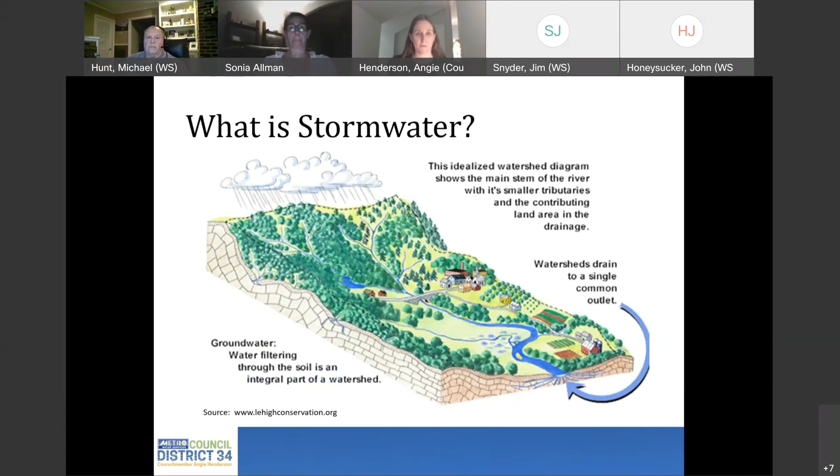So Nashville has a lot of watersheds. We have 2,478 stream miles in Davidson County. So we are very fortunate to have a lot of water. A lot of water also can lead to a lot of flooding and a lot of development issues.

So when a drop of water hits the ground, depending on where it hits, for instance, if it hits on the top of a hillside or a mountain, it's going to drain down one side or the other. Where that drainage basin is, is called a watershed.

So this is the area, and Michael, you may need to help me out because I am not sure what this slide is showing. I saw Matt Tays was on. He works for Ricky. Matt, are you able to come on and share anything about this slide?

Yeah, this is Matt, y'all hear me okay? Yeah, so this is one that Ricky wanted to possibly show, as we mentioned, this is just a big picture view of the delineated area for the watershed, for the area that covers Nichol Lane and Page Road and all those areas that drain down to Tyne Boulevard. So don't know how much detail we want to go into this right now, we could always come back to it later. But this is just kind of giving everybody a big picture view of what the delineated areas are that drain specifically to, what comes off the park, what comes off areas west of Page Road, and those areas that kind of drain through Nichol Lane, that area between Nichol Lane and Page Road.

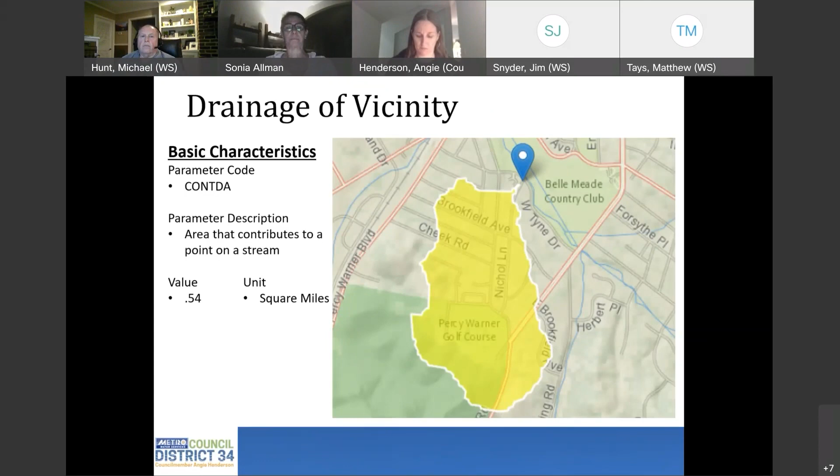So when we talk about stormwater, we clearly have a lot of stormwater infrastructure. Nashville is the 4th largest municipal separate storm sewer system, an MS4, which is really all of the ditches, conveyances, and appurtenances that carry stormwater. We cover 526 square miles, have a population of over 659,000, with 11,000 outfalls.

When you look at the various stormwater components, we have over 56,000 inlets, 3,800 miles of pipes, culverts, and channels, and on our stormwater control measures, that's 6,100 structures. So we have a lot of infrastructure that has to be maintained, repaired, and upgraded, and maintenance on stormwater is never a one and done process.

As you know, especially in the fall, we have a lot of storm drains, some of those 56,000 inlets, that are continually being clogged with leaves and debris. Anything thrown out a car window, or that falls off a tree, or is pushed down by stormwater, often lands on top of those storm drains and causes clogging. Those blocked storm drains can lead to flash flooding and especially roadway flooding.

So we have crews that are always going out and cleaning and maintaining this infrastructure. So when I say maintenance, it's something that we can do one day and then we're back out there the very next day doing it again.

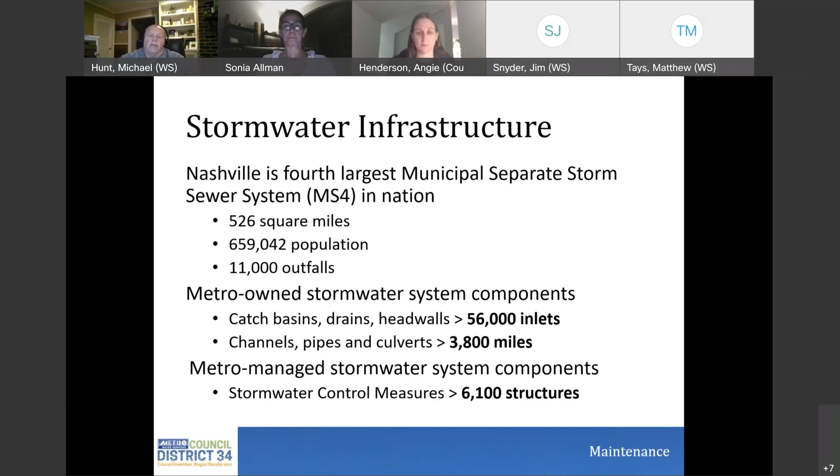And Ms. Allman, if I can, in the maintenance area you were mentioning stormwater inlets, of which we have a few in the vicinity of Page Road, but we are primarily suburban context. A lot of our difficulty, especially in the Page Road corridor, neighbors - and I would encourage you all, please don't put your paper bagged leaves and debris in the ditches - a lot of the stormwater coming over the road on Page Road, flowing onto the creek, is getting caught against people's own driveway culverts. So I wonder if you can speak to that.

I know when we're having an event, folks can call 311, or go to hub.nashville.gov. But could you speak to the maintenance space, kind of the orders of magnitude? If you have a small obstruction against your own personal driveway culvert, the city - and I would ask - that you remove that obstruction, that you be mindful of that and try to do that yourself. Obviously, if there's something in a stormwater conveyance of a higher order of magnitude, that's something you all are going to come out to. Could you give us a little clarity in the maintenance area you're speaking to at the top?

Absolutely, and that ties in perfectly because maintenance is our top stormwater section here. They restore function to the existing system - doing repairs, cleaning, stabilizing, ditch maintenance, masonry work, and they clean and vacuum stormwater structures. When they vacuum these, they're using a very large vac truck that has high pressure water that pushes the water in and then vacuums it out, which stops any type of clogs and blockages.

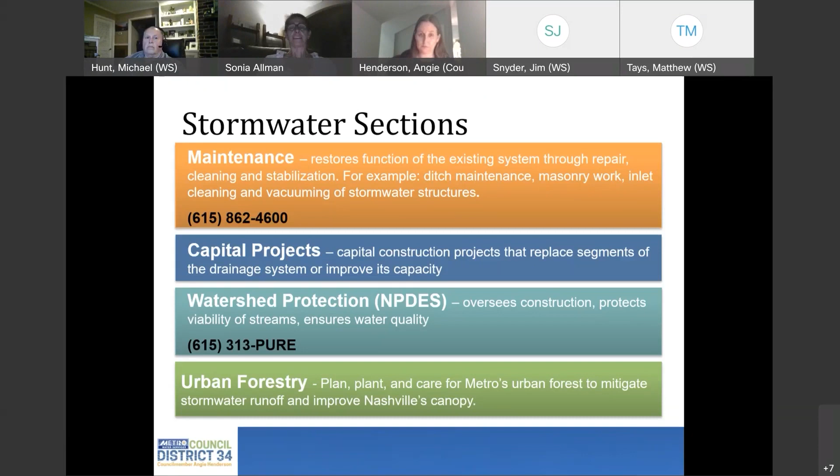Hey Sonia, this is Ricky. I was able to get on now, finally. Oh well, I will hand it over to Ricky then, just in time for him to talk about stormwater maintenance, which is his section. Welcome, Mr. Swift. Thank you, my apologies, I had some technical difficulties.

Okay, stormwater maintenance. It restores the function of the existing system through cleaning and stabilizing without major reconstruction. And in the images there, you can see some examples, some ditch work our crews have done.

Next, stormwater program efforts - these are things our program has been able to achieve. We've been around since 2002. As far as our capital program, that funding did not come around until 2010.

But through the years, for Davidson County, we have received a total of 40,300 service requests. These are calls that come in from residents about various issues. We go out and investigate each one. Sometimes someone has an issue that they think is a stormwater issue, but it really should go to another department, but we'll go out anyway, take a look just to make sure, and then we broker it to make sure it gets to the right group.

If it is ours, we go through our process of evaluating it, determining the severity of it, the best way to approach it. From those 40,300 service requests, there were generated 37,200 work orders. This is work that was performed by stormwater maintenance crews.

We have 9 crews that go out every day. They're out every day doing work in every district, cleaning out ditch lines, cleaning out pipes, replacing driveway pipes, redigging ditches, just addressing various drainage issues across the county.

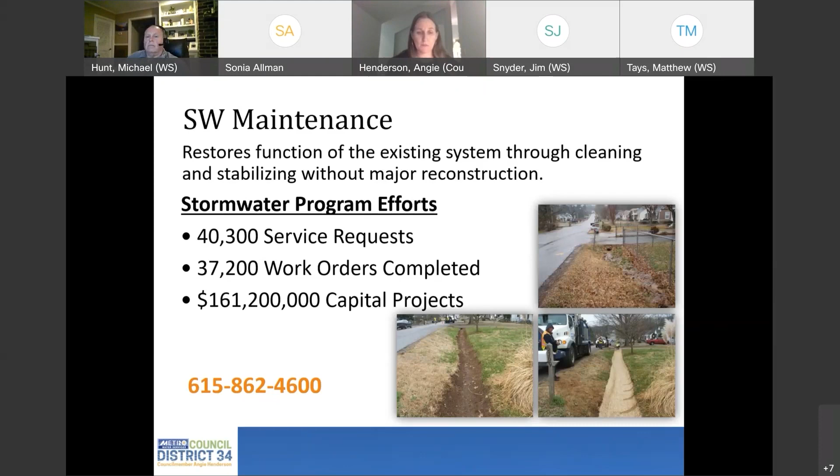We're here in this. Okay. My screen is still showing the stormwater maintenance screen. It hasn't moved yet, so it looks like my technical difficulties are continuing. The slide that Mike has moved to is not showing up on my computer. But hold on, give me 2 seconds. Hold on, I've got a hard copy. Hold on.

It's slide 10, Ricky, if that helps. It do. Okay, all right, again, all right, here we go.

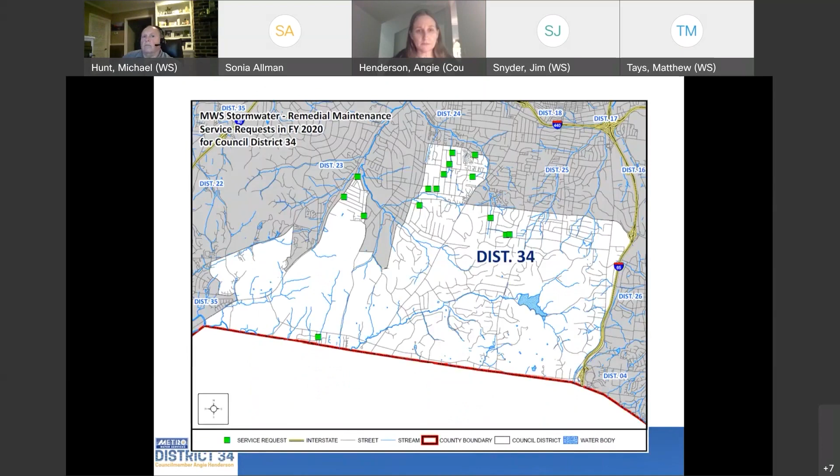This is just everything that's come in during this time frame for this report that we sent to the council. The next slide is similar, but these are service requests resulting from things of a remedial nature, things our crews could not address, and these go into our pipeline to be evaluated as a capital project. If you go to the next slide, you'll see about 5 down, 1223 Nichol Lane and 103 Page Road. As far as some of the locations there, that's a concentrated location of the council lady's mention there.

Okay, Mr. Swift, do you have, per my request, a summary of all the service requests recently in this area over the last few years, or what's in progress, or can you share with neighbors what's happening? I know you've been out cleaning out ditches and sizing them and doing some specific culvert projects. Is that among your slides? Give me 1 second, please.

Okay, no, that's not one of the slides, but I do have that information here regarding currently everything that's open, the open service requests in District 34, which right now is a total of about 36 or so open service requests, ranging from needing to get ditches cleaned out, clogged culverts, sinkholes. It's just kind of a hodgepodge of everything that's still open there in the district.

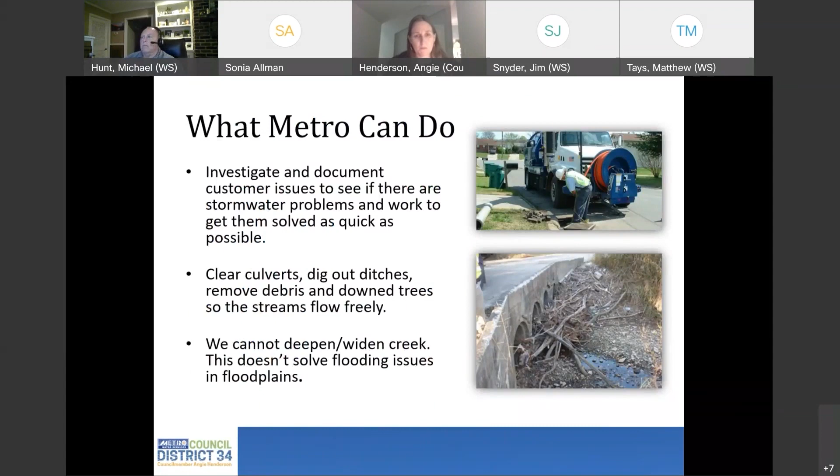The next slide is what homeowners can do to reduce runoff: redirect the downspouts so they're not directed directly towards your houses, but away from them.

Plant rain gardens in those low-lying areas you have on your properties. Install rain barrels to capture runoff coming off from your roofs and other areas. Plant trees. Planting trees does a lot to absorb runoff stormwater once it perks into the ground.

Clean up storm drain grates. You go outside and you see an inlet out in the street that's covered up with leaves or debris. Go out, knock it off, and that will help out a lot. Or you can just call our department and we'll come out and do that as well.

To protect your property, elevate or relocate service equipment such as HVAC or electrical equipment. Install a sump pump, install flood barriers, and get flood insurance. That's very important if your home is in a place that sees continuous flooding and receives continuous damage.

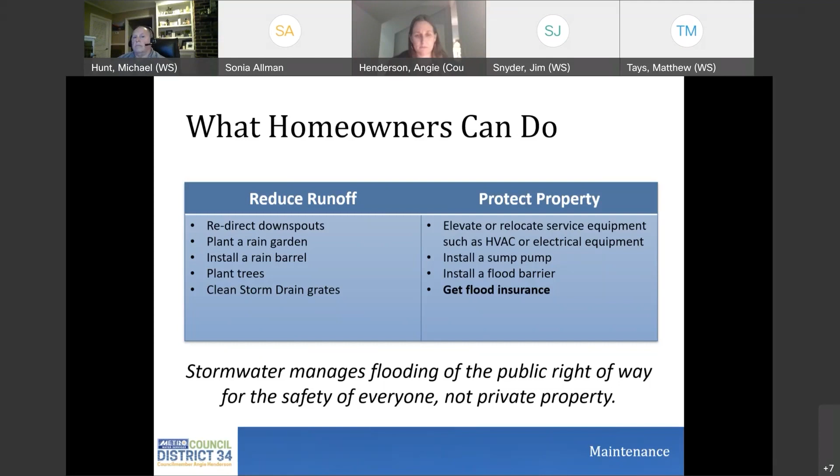Stormwater management addresses flooding of the public right-of-way for the safety of everyone, not private property.

The next slide is how do we determine projects? We have investigators go out and meet with homeowners or property owners when there are issues. Those investigations are evaluated by one of our engineers to determine the severity of it, the best way to approach it—whether it's something that can be handled by our crew, or if it needs to be part of a larger capital project. Maintenance is prioritized based on that severity.

The actual design for those projects—we have several firms under contract. They take those areas, go into evaluations, determine the larger picture, and then down to the details of what size pipes need to be installed, where ditches need to go, whether there needs to be installation of a whole new drainage system, or if there are blockages that may be impairing the system at some point. To evaluate all that, we come up with our construction plans.

And we have an annual contractor that we utilize to help go out and knock out these projects for us, and that's when it actually gets to the construction phase.

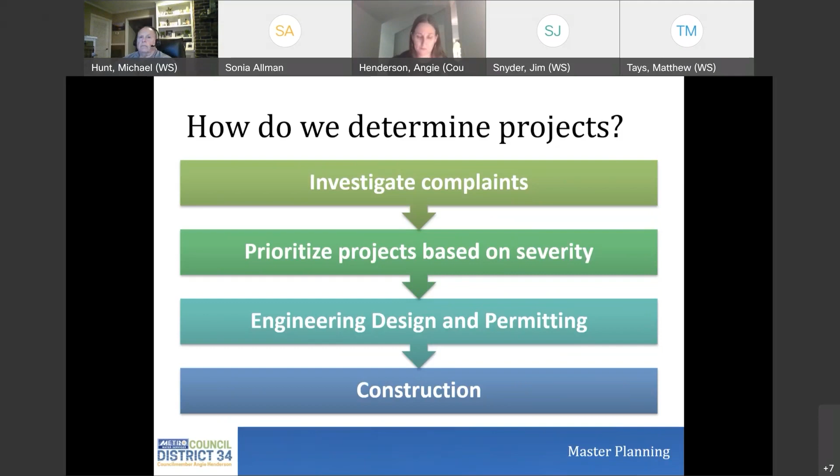And at this point, the discussion will move to NPDES. All right, my name is Michael Hunt. I'm manager of the NPDES group, actually better known as Stormwater Quality.

I'm going to be brief because a lot of what we do relates to non-residential areas, but there are a few aspects that I thought folks might want to be aware of, and I'm going to have a summary page in just a second to give you more contact information if you want it after tonight.

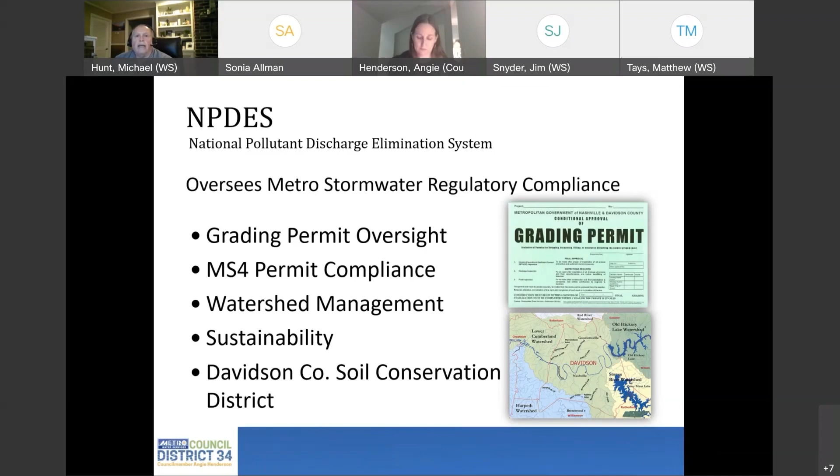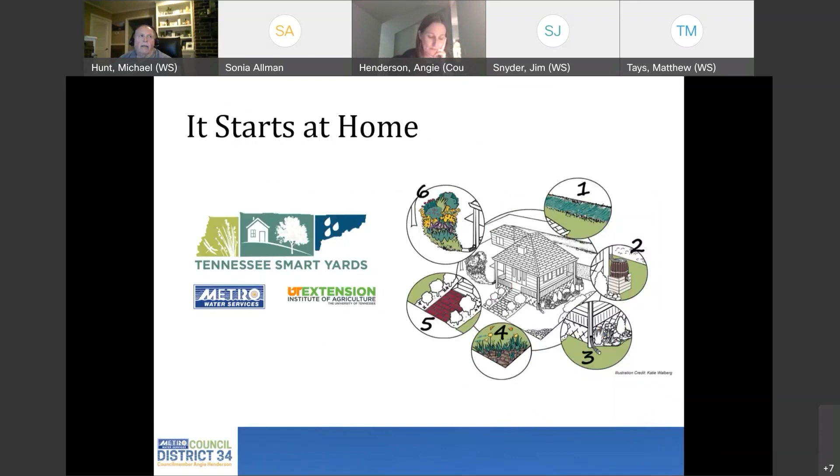We're made up of a group of 5 eclectic activities relating to the watershed and how we can improve stormwater quality. One of the things as it relates to residential neighborhoods is the public education aspect. It's already been referred to—we're a participant in the Tennessee Smart Yards program. That's just one example of the types of services we can provide the public. At the end, I'll have a link to our public education page if anyone wants more information.

As has also been mentioned, the Urban Forestry Initiative as it relates to stormwater is within our group. Metro is somewhat unique across the country in that we have nested urban forestry coordination within stormwater. Trees are a tremendous stormwater management tool. A forested area, generally speaking, over the course of a year will serve to infiltrate about 95% of the annual rainfall, so they are very valuable tools. They also provide some intangible benefits as well—social benefits, heat island effect benefits, things like that. So we're initiating several activities to try to benefit Metro's tree canopy, and I know Council Member Henderson has been a strong advocate of those activities for Metro in that regard.

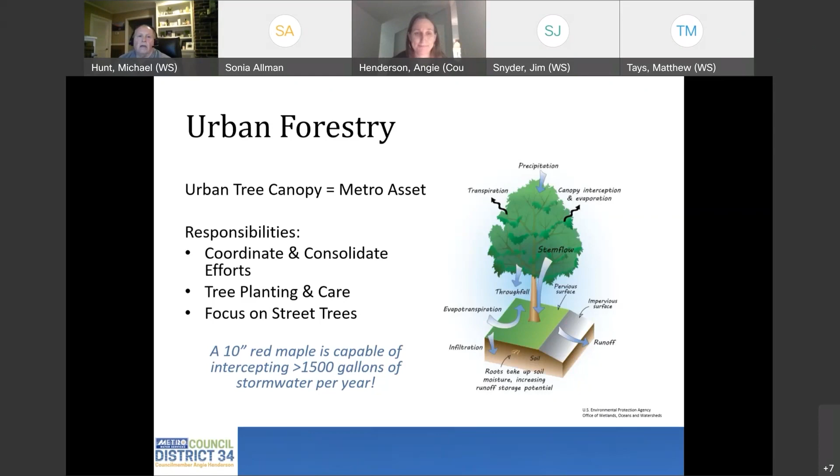This is a brief summary of what all our office does. We are sort of the regulatory arm of Metro Water Services Stormwater. For sites that get grading permits as part of their development activity, we have inspectors routinely visiting those sites to make sure they are being built per plan and that their erosion prevention and sediment controls are in place so they won't lose sediment.

Just to give you an idea of the scope of that right now, we have over 900 active permits. In any given year, we do over 8,000 inspections of those sites, and we do various enforcements when they're not doing what they need to do, to include stop work orders. We do have, I mentioned earlier, outfalls.

There is a regulatory obligation for Metro from EPA and TDEC at the state regarding the need for Metro to oversee the watersheds such that those outfalls are not discharging pollutants to the waters of the state, to the streams. That involves us with industrial sites, commercial activities, anything within the community that might serve to put pollutants in the storm sewer system. Stormwater is interesting in that a lot of utilities are within closed conduits, so the realm isn't as large. But for stormwater, there are thousands of acres of private property that route to our system. So we're involved with a lot of different things as it relates to that permit, making sure even Metro's activities aren't creating stormwater issues.

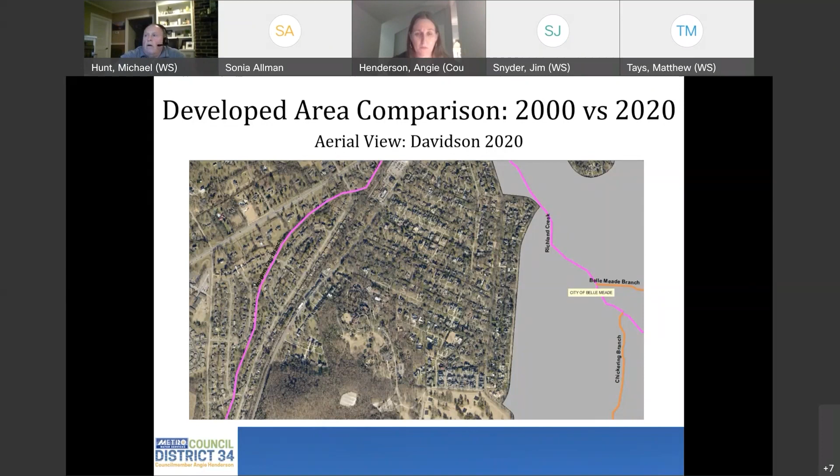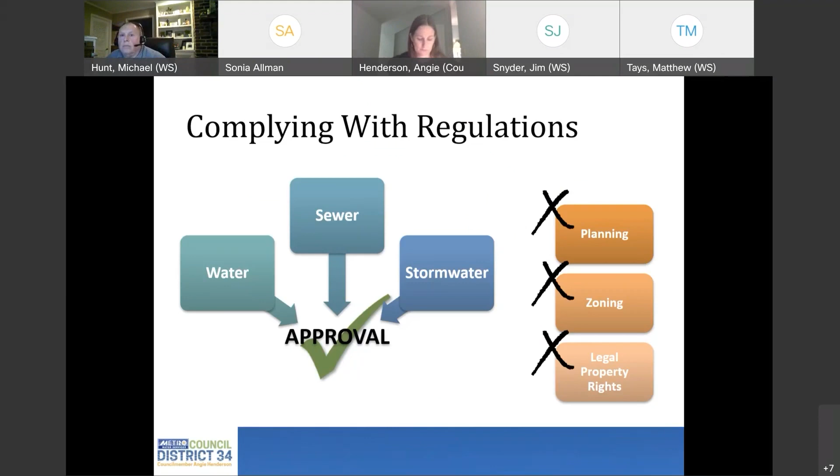Okay, so just to run through this, our development services section covers everything from permits, availability, technical review, infill and field activities. As for complying with regulations, this group ensures that all the requirements for the water lines, the water system, sewer system, stormwater, make sure all those things meet state, local, and federal regulations. Our planning group, zoning group, and legal group are all part of the whole process.

All right, stormwater regulations - just a little background on the history of stormwater. Stormwater regulations did not really kick in until 1979. Prior to 1979, I say there were no regulations. As far as floodplain and floodway, those really weren't mapped out until after 1982. So prior to 1982, anyone could build a house right next to a creek and if someone said something about a floodplain, you'd go, well, what's that? Because it really had not been defined yet.

But they went through a process of studying and evaluating various rivers and streams, and determined based on different rain events - 10-year, 50, 100, 500 year events - they were able to determine just how far out from the banks of a river the water would come. With that information, they would determine the zones where building houses - particularly in the floodway - you cannot build today, whereas years ago you could.

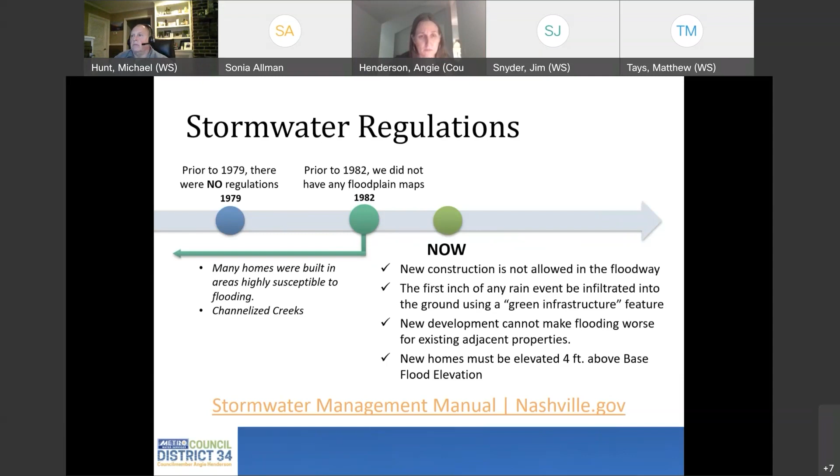But using that process kind of helps determine where houses go, and that has been a huge help. So we know after 2010, houses that were built too close to creeks and streams, or the finished floor elevations were too low. I really felt that after that, the requirements for houses to be elevated higher and to not be built within those zones has really helped save property and save lives. Imagine next time we have an event like that, where some of those houses were, there won't be any, and there won't be people that will have to be rescued.

The approval process, this just kind of goes through the initial approval. When you have a subdivision or development going to do, you come in with your engineering plans, you pay the fees to go through the process. Participation or maintenance agreements, there's a detention pond or water quality devices that be part of the development. Once you go through the process of getting everything reviewed and you meet all of the regulations, then you're approved to start your construction.

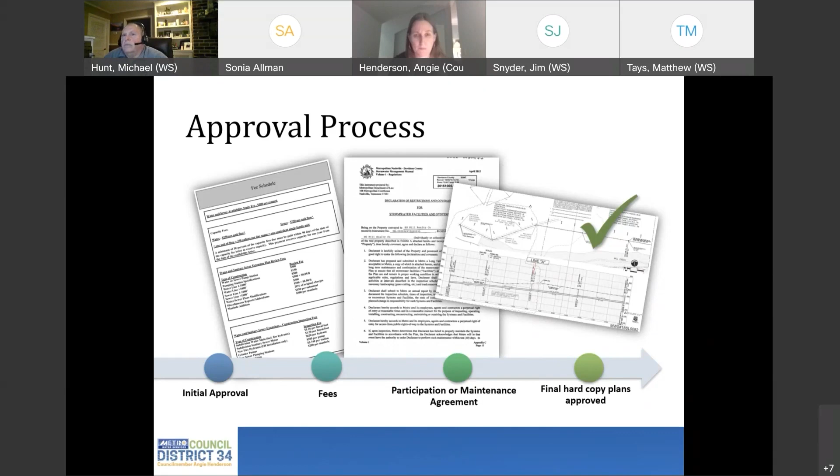This graph right here is just a quick and dirty look at, everyone knows that Nashville is growing, there's always construction going on. You look starting at 2011, each year, just the increase of development that has taken place here within Davidson County. So definitely on the upswing here. I would note, Ricky, on this slide, I'm not sure what the year to date was on that, but I have a feeling that was much earlier this year. We're on track to, again, this year set records for development.

We're at an all-time record high of grading permits. I mentioned we're at 904. And then I know our single family stormwater, we have well over 1,000 of those permits that we're monitoring right now.

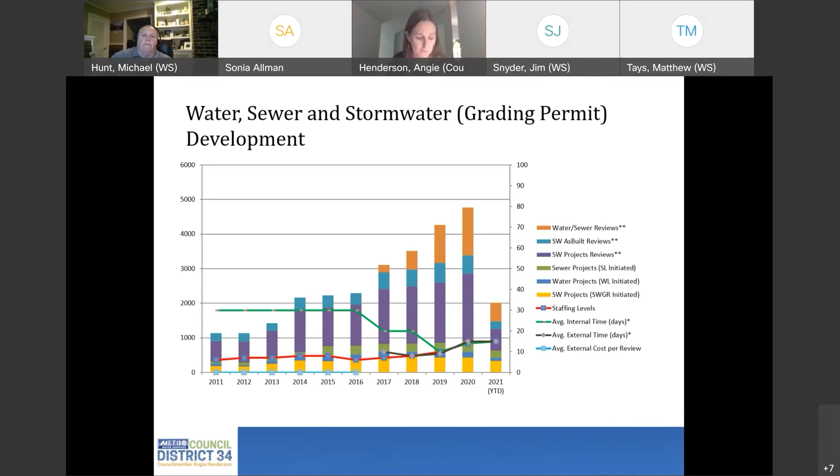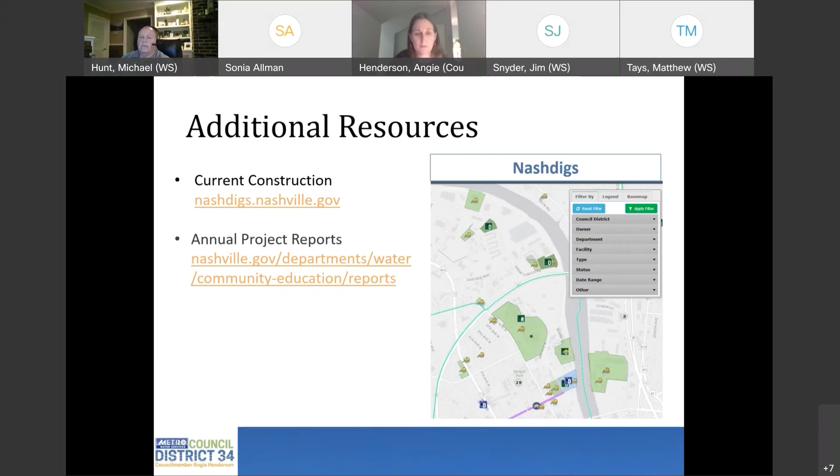This last couple of slides is talking about additional resources. Nashdigs, that's where you see about any metro projects that's taking place across the city. To see the annual project reports, there's a link there in the nashville.gov to the projects being done by Metro Water Services. The next slide has links for just the website to stormwater, any flooding emergency.

615-862-4494, water quality issues, 615-313-PURE. And I would just add as a postscript that we really would direct people to go to and use Hub Nashville. That process is well established at this point and fairly easy to use, and it gives you an automatic update on your concern once we enter in our findings and resolutions. So in addition to these resources, would again encourage you to use the Hub Nashville resource that Metro provides to the community.

This is Sonia, and clearly when I wrote this slide, I don't know what I was thinking, because the flooding and emergency number is 862-4600. 862-4494 is actually my office, that's your number. So please do not call me in an emergency. 862-4600 is our customer service and dispatch, and that is manned 24 hours a day, 7 days a week, including holidays. So 862-4600 is that number you would call.

Thank you, Ms. Allman, and thank you, Mr. Swift and Mr. Hunt. I guess, as Mr. Swift was speaking most recently about our regulations particular to new home development and infill development, I think when we get in the question and answer stage, we'll kind of come back to some of the things that come along with new homes, fences, and so forth, and some of the best practices around that.

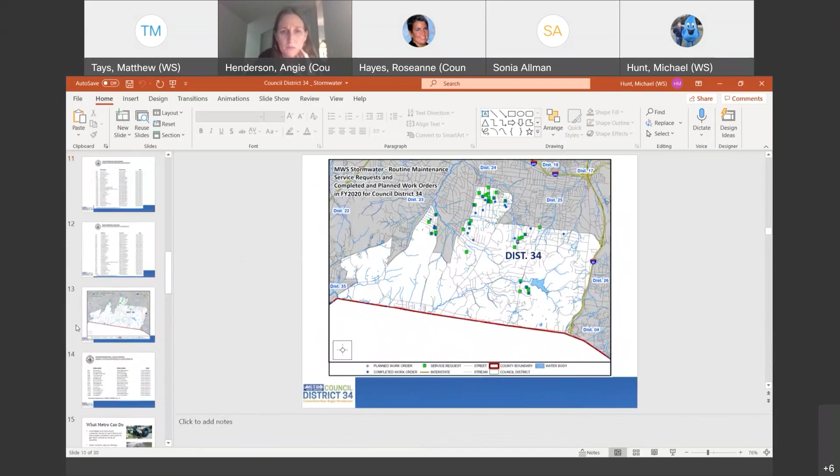Looking at those type of options, it would be a significant amount of funding we'd have to do, and also coordination with NDOT and other utilities, because if we took anything down Page Road it would be pretty disruptive. We'd have to relocate utilities and so forth. So those are some of the challenges with looking at those options.

Understood. But Mr. Tays, can you speak to this, just so neighbors can understand? You mentioned Jardin de Bell, now known as the Bell Park subdivision, and folks can see that as a rectangle somewhat at the center of this illustration. So there's water coming down there, overtopping. What you were saying is one among the proposals would be to take a stormwater pipe down Page Road, turn on Brookfield, and take that stormwater pipe down Nichol Lane.

Can you help neighbors understand proportionally the amount of water coming, the watersheds within the watershed, so to speak? Can you speak to percentages, like how much of the water that falls out into Richland Creek or is running down the creek in front of and behind homeowners on Nichol Lane and Page, how much of that is coming out of the park and how much is coming on the path along Page that you mentioned, please?

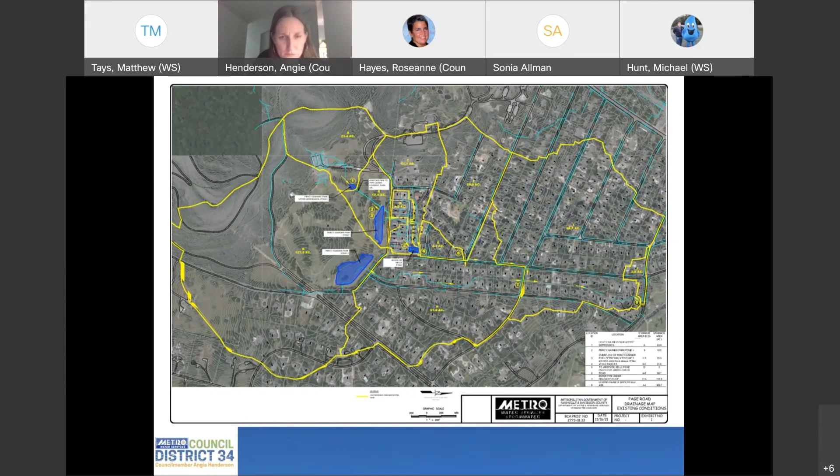So each one of these sub areas ultimately drains down to Page Road. I had a pointer earlier, but I don't think this one has the arrow. Each sub area drains to the next sub area.

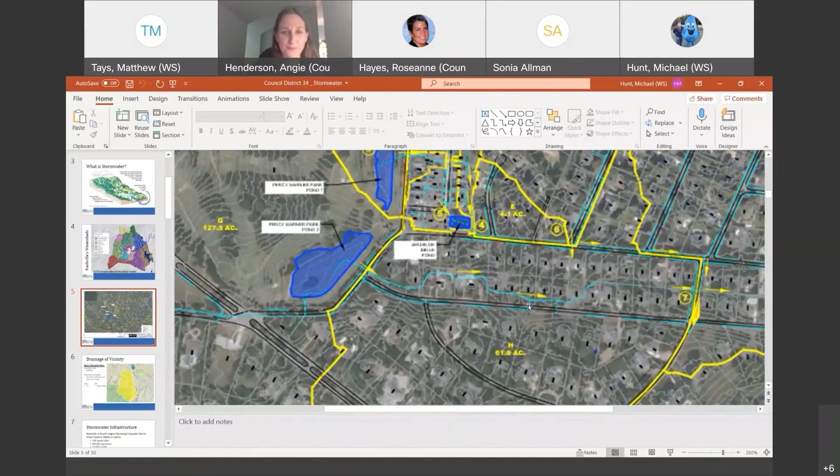Thank you. So for instance, at the top at A, you see that number 1 shows that area flows to that little small detention area on the park. Then from that point it drains to area B. B drains down to the Jardin de Belle Pond and is routed through that subdivision. And then ultimately down to another pond on the Jardin de Belle, which is a detention pond specifically just for that subdivision. So all that water from the park is actually routed through that subdivision, and it comes down on the outside and ties into the stormwater infrastructure on Page Road.

So the people on Page Road and Nichol Lane specifically are in section H. If you want to scroll to the top, you'll see the subdivision. No, go the other direction.

Yeah, right there. So subcatchment H there is mainly those folks that are on Page Road and Nichol Lane at the upstream end of it. And you can see there on the flow lines, that area there all drains to a culvert underneath Brookfield, where that number 7 is.

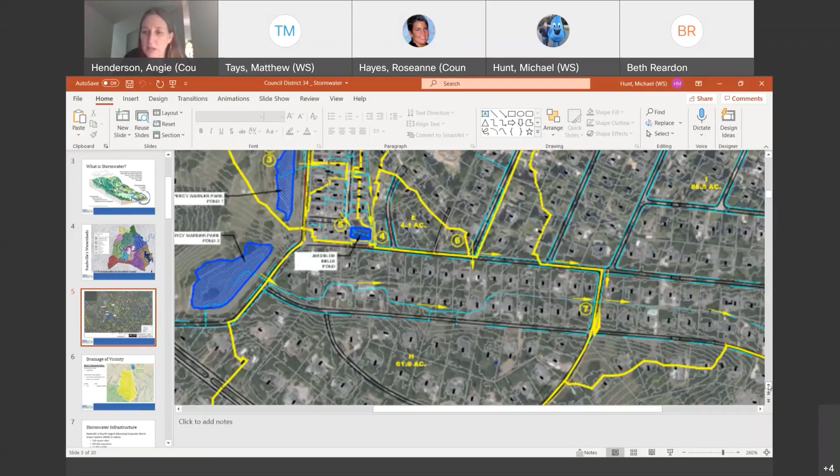Neighbors, I appreciate your patience with some of our technical difficulties. I appreciate staff's presence here today, and I know we all went a little long. Neighbors, I want to acknowledge your frustration as well, but I think we finally got to the information we needed as we got to the end of the meeting. I have some work to do on the capital side of things and getting follow up on that. I will compile all these questions from the chat, and we'll have an email go out in the coming days summarizing the findings of the meeting, with a link to the meeting included. With that, thank you everyone for being here, we appreciate your time very much, and I hear your concerns. I will continue to work for you with the department to make sure they get addressed. So thank you, everyone.